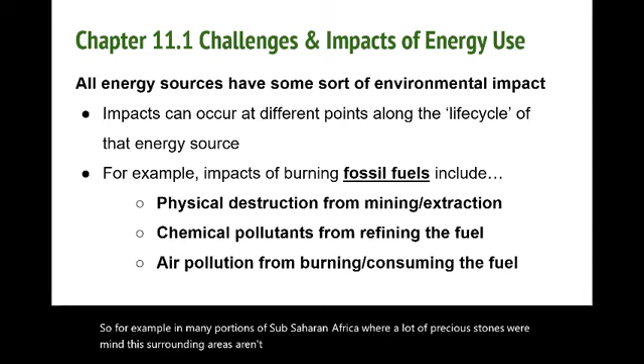Things like destroying mines, when we extract out precious minerals, we're often destroying the habitat around that area. For example, in many portions of sub-Saharan Africa where a lot of precious stones are mined, the surrounding areas aren't maintained in terms of keeping that ecosystem intact.

What else could happen? Well, when we burn fossil fuels, oftentimes it releases chemical pollution into the atmosphere, and that can happen during the refining process. We also burn a lot of our fossil fuels, and that can release a lot of air pollution, chemical pollution, and destruction of habitat, if you think of something like coal mining.

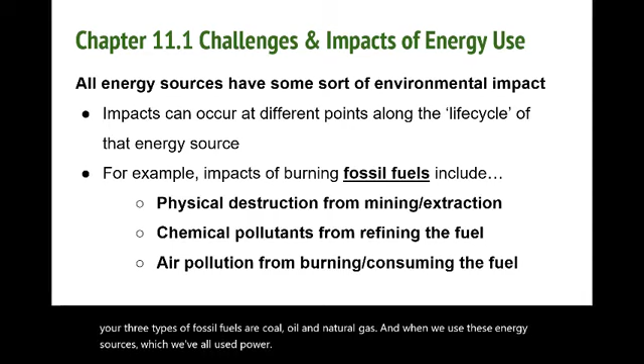Remember, your three types of fossil fuels are coal, oil, and natural gas. When we use these energy sources, which we've all used in our daily life from burning fossil fuels, that directly impacts the environment.

When we look at certain forms of energy like coal, oil, or natural gas, we group those into a category called non-renewable. What that means is when you use up that energy, there isn't going to be more of it. For example, if you mine a diamond, when you come back to that same spot next week, there aren't going to be more diamonds there.

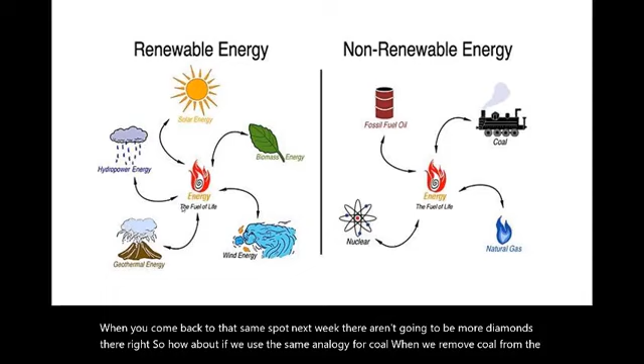So how about if we use the same analogy for coal? When we remove coal from the earth, we're not then able to generate more of it. It doesn't renew itself, so we refer to it as non-renewable energy. When we use non-renewable energies, like the ones on the right-hand side of this slide, it's not sustainable for a long period of time, because eventually you would run out since these forms of energy aren't renewing themselves.

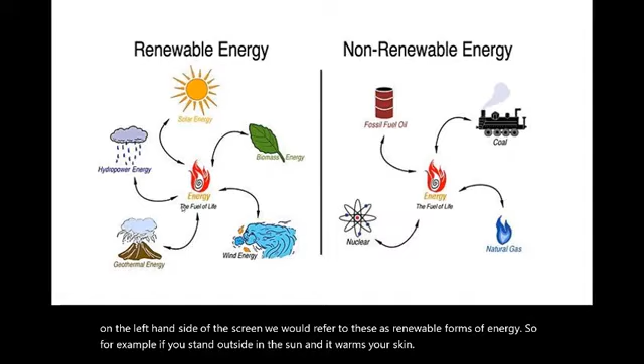But let's take a look at the forms of energy on the left-hand side of the screen. We would refer to these as renewable forms of energy. For example, if you stand outside in the sun and it warms your skin, and you go out tomorrow, the sun hasn't run out of energy because you used some of it yesterday, since it's a renewable form of energy. We don't run out of it.

What's another example of that? Well, wind energy would be an example. If we power something using wind energy, we don't run out of it, meaning that the next day when you go outside, there would still be more wind available. So it's a renewable form of energy.

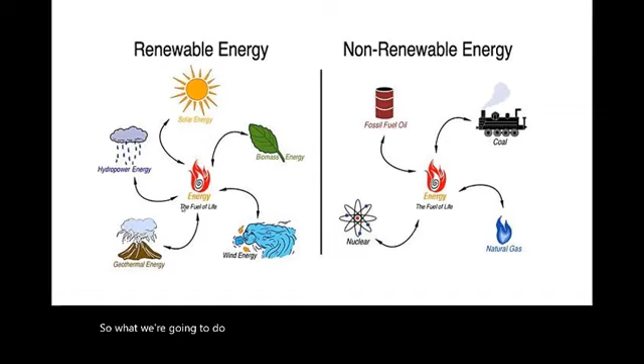In our previous lectures, we've talked about non-renewable forms of energy. In this lecture, we're going to talk about renewable forms of energy, and these are considered to be more sustainable because they don't run out. So what we're going to do next is review forms of non-renewable energy and then some forms of renewable energy in much more detail. Let's start with the non-renewable.

Non-renewable, remember, those are our fossil fuels, things like coal, oil, and natural gas. These are used all over the world in global economies that impact our ecosystems significantly. Why? We're extracting and refining coal, oil, and natural gas faster than we could ever generate them. It takes millions of years of heat, compression, and really high pressure to form these fossil fuels, so we can't make more at the rate we're using them up. And when we burn these fossil fuels, it produces a lot of pollution, which has negative impacts on our ecosystem.

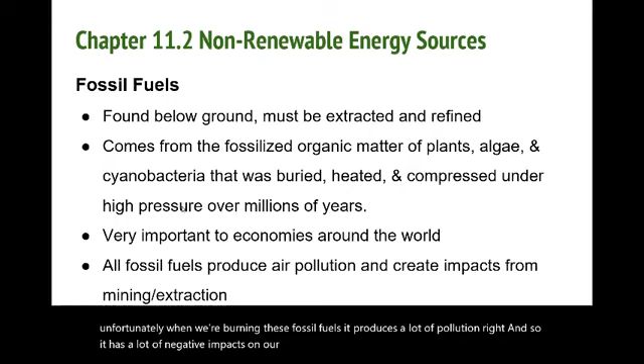So let's go over each of the fossil fuels: coal, oil, and natural gas. Let's start with oil, also called petroleum. It's a liquid, and it goes through a really long refining process. If we think of all the energy in the world, about 40% of it comes from oil, so you can see oil is a really important source of energy.

We're not really sure if we've reached the peak of oil production, meaning we don't know if we're at the peak right now. Is it going to decline more in the future, or could it increase even more? Scientists have tried to estimate that, but we really don't know. We know that global consumption rates are very high, but depending on how many alternative fuel sources are developed, we're not sure what consumption rates could be like in the future.

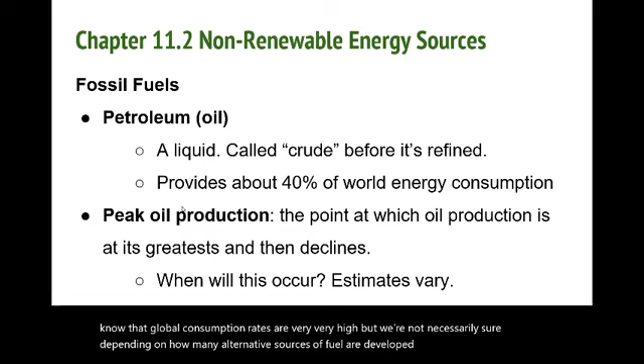The other fossil fuel is coal, and the difference between coal and oil has a lot to do with price. First of all, it's very cheap compared to oil. What else is different? Oil was a liquid, coal is a solid - picture a little rock or small stone that looks like coal, black. It's burned, and when it's burned, it produces energy that can be used as a form of electricity.

Throughout the United States, there are places that use coal as a power source. When we pay our electric bill, we may not know where the energy came from when we plug something into the wall. In many parts of the country, some of that energy comes from burning coal. To get the coal requires stripping an ecosystem of many resources, because coal is mined from underneath the surface of the ground - you often even have to remove a whole mountain to get the coal underneath. So although the coal itself is cheap and plentiful, the problem is the amount of land and ecosystems actually destroyed to remove it.

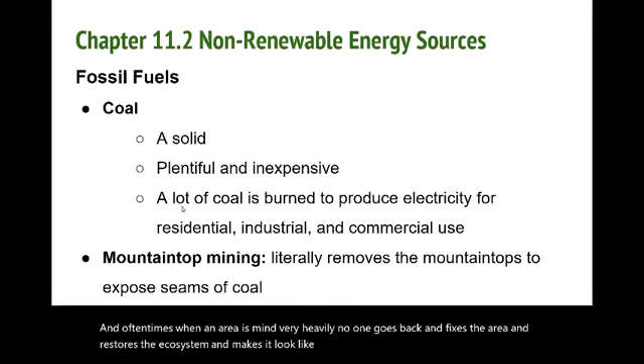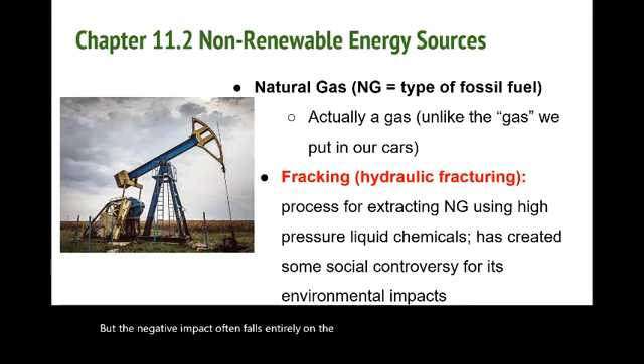Another type of fossil fuel is natural gas. It's really interesting because even in the last 10 years, in your lifetime, we've been finding more sources of natural gas. There's a very complicated process to extract natural gas from underneath the ground using a lot of high pressure, and that process is called fracking. Just like our other fossil fuels, the good thing is that it gives us energy - that's the good thing about natural gas. But the negative impact often falls entirely on the environment, so that's where we're often paying the cost for a lot of these fossil fuels.

Another non-renewable energy source, not a fossil fuel but another category, is nuclear power. This is a form of energy that uses highly radioactive compounds and does reactions of fission and fusion to produce a huge release of energy. The good thing is that it doesn't increase greenhouse gases or carbon dioxide like the burning of fossil fuels. However, the risk is that when there's an accident at one of these nuclear power plants, it can release really strong radioactive waste into the atmosphere, into the ground, and into the surrounding plants.

Some of you may have heard about one of the famous accidents at a nuclear power plant, which was in Chernobyl, Ukraine. There have been accidents in other countries too. In the United States, there was an accident at the power plant at Three Mile Island.

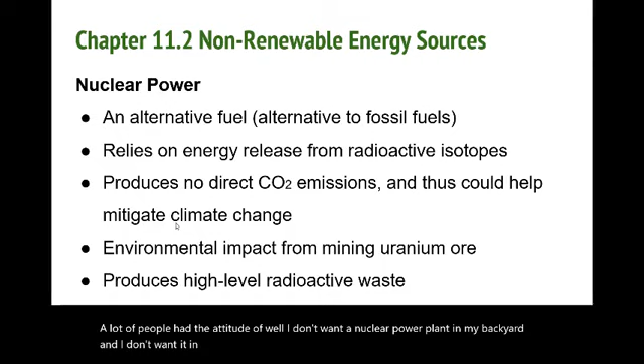These power plant accidents have made people worried and hesitant about the potential for releasing radiation. It isn't necessarily true that every nuclear power plant would have an accident, but that fear has really led to the decrease of nuclear power plants being built across this country. It's largely because of fear, with people saying, well, I don't want a nuclear power plant in my backyard or in my area. That led to the decline of certain types of nuclear power.

So we've gone over fossil fuels: coal, oil, and natural gas. We talked a little about nuclear power. What other forms of energy are there? Now we're going to switch gears and start to talk about renewable energy sources. These are different because when you use this energy, you don't run out of it, since the source itself is renewable.

The first renewable energy source we'll talk about is hydropower. Hydro relates to water. Water spins a turbine, and the same water can be recycled again and again, generating a current which can generate electricity. This can have some harmful effects on the environment, but nowhere near the effects of burning fossil fuels—for example, we wouldn't have increased greenhouse gases or destruction of an ecosystem.

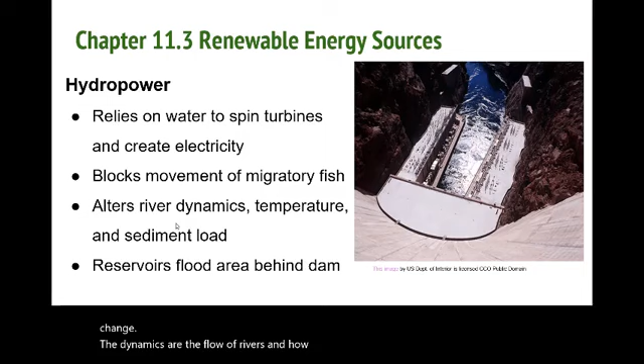But sometimes there are still harmful effects. For example, when hydropower plants are built, the fish in that ecosystem can suffer. It can change the temperature in the surrounding water, and it can change the dynamics or flow of rivers and how water naturally moves, since we're now changing that with the turbine.

Another source of renewable energy is municipal solid waste. You might think, how could waste generate energy? Well, it's by actually burning it. What you're seeing in this picture is municipal solid waste—an easier way to say that is just garbage or trash in a landfill. When you burn it, you can collect electricity from that heat.

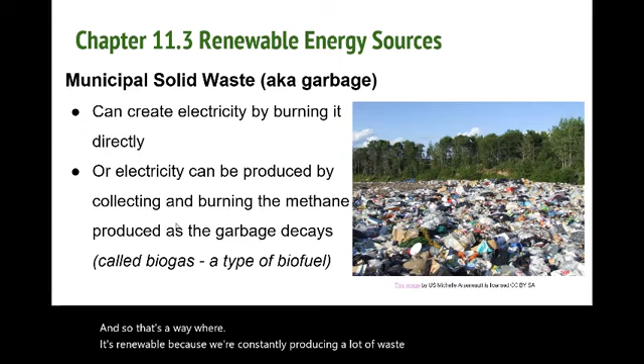The dead material in the trash or garbage starts to decay, and as it decays it produces methane gas. Burning the methane that's produced is a way to generate electricity. This is renewable because we're constantly producing a lot of waste, and we're able to create energy from something that otherwise would be thrown away.

Imagine in that waste there were organisms with cells and tissues—like plants put into solid waste, chicken bones after someone eats chicken, or a tree trunk. All of that plant fiber and material, when burned, can generate fuel.

We call that biofuel, made by burning biomass. Even agricultural crops like corn husks can be burned as a source of fuel. This is a form of renewable energy because you can constantly generate more biomass—you're going to have lots of waste. If you've heard of people composting, that can be used as a type of biomass.

When deforestation happens and extra materials are thrown out, that could be used as biomass. Animal residues and industrial waste can also be used as biomass to generate biofuel. So rather than relying 100% on fossil fuels, if we rely more on renewable energy sources, we're using some of our waste in a constructive way that produces energy.

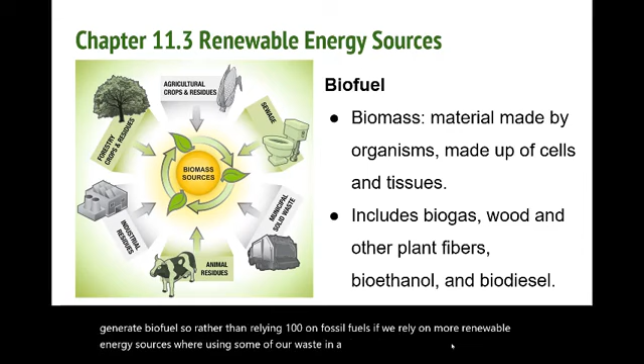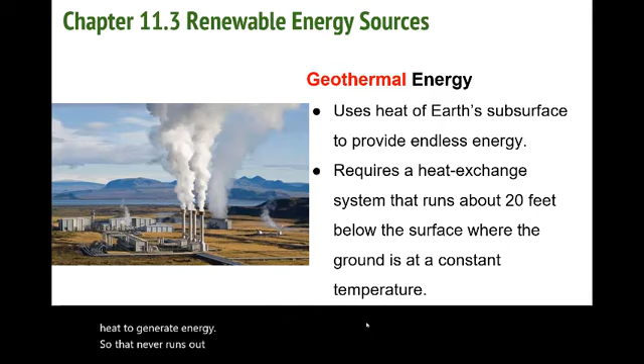Another form of renewable energy is geothermal energy, which uses the heat trapped right underneath the surface of the earth. The picture on the left shows the heat exchange system and how it runs below the surface, bringing up some of that heat to generate energy. It never runs out. It's constantly going to be warm, so we can constantly generate more geothermal energy.

Those cells can store sunlight and then use it as electrical energy, kind of like little storage containers. They store up all that sunlight, and later you can use that as power. It can even be used in a battery, or to power the electricity of a huge industrial building. This is a form of renewable energy because you're not going to run out of it. It pays for itself, and these are forms of energy that are less harmful for the environment.

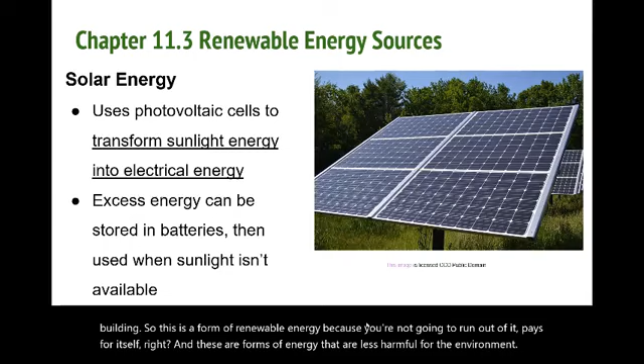So we've gone over some types of renewable energy. What could you say about them? We can actually group them into a category where all of the energy produced from renewable energy really comes down to just 3 different sources. One, it all basically comes from the sun, or it comes from that heat trapped underneath the surface of the earth, or it comes from the force of gravity itself - gravity pulling things in a particular direction allows us to harness that energy. If you think of something like hydropower, water is moving because of gravity, so we're able to use that energy.